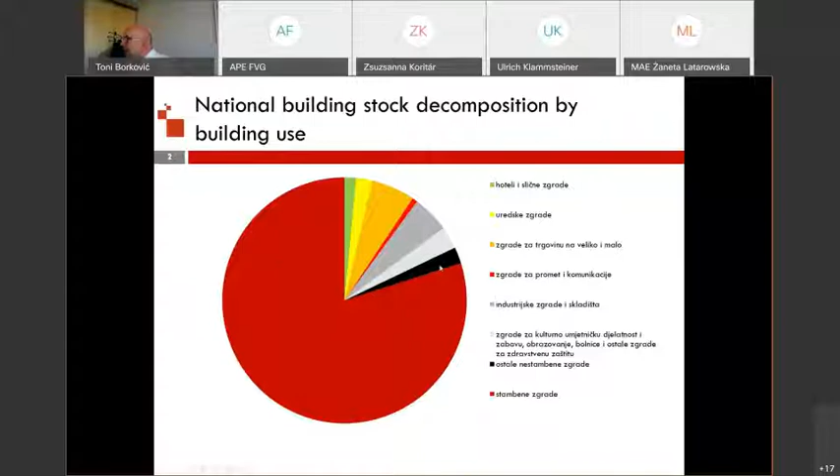I wanted to show you that we also have about 80% of the buildings in the residential building stock.

What actually is happening to the building stock in the period between 2011 and 2018, as Croatia has set up the building registry early this year in regulation. It will take some time to consolidate all the databases into the actual national building registry, which will have plenty of interesting information, as it will connect the cadastral database, building ownership information, and energy performance certificates for each building and each unit in the building.

But until the registry is actually operational, we always have to try to see what the latest situation with the building stock is, building on last census data and estimating new construction through issued building permits, completed building survey data, and demolished buildings data. We also have to take good care of the ratio of inhabited and abandoned residential buildings, because as I will show you, it presents a pretty big problem in Croatia.

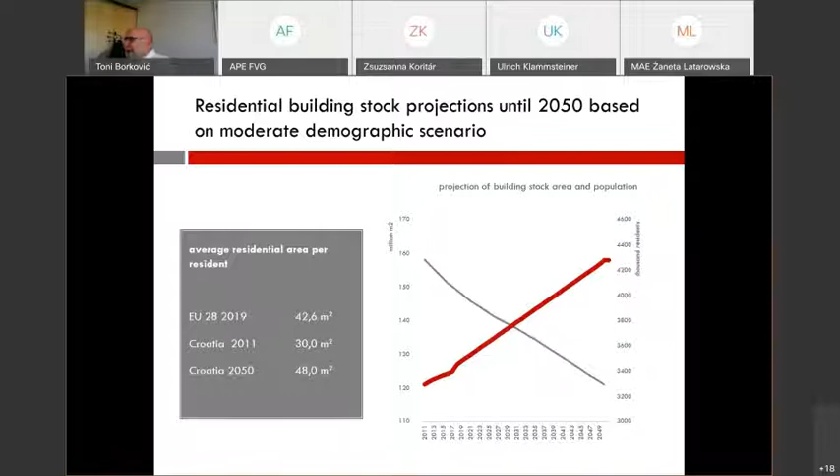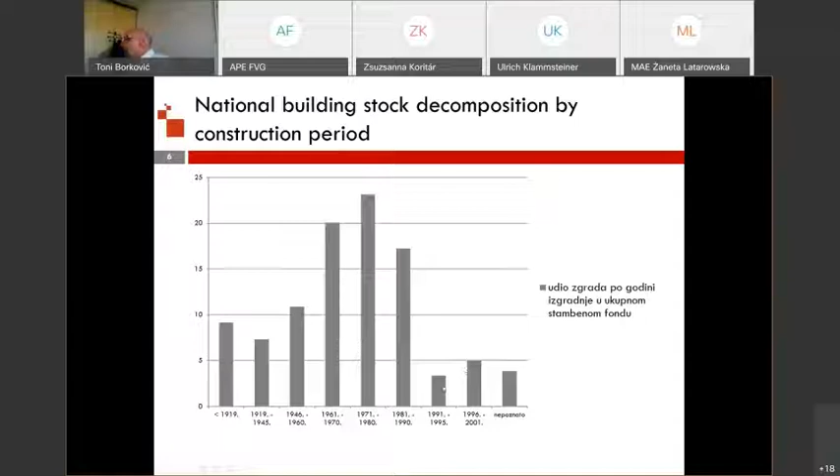If we look at the composition of the building stock by construction period, we can see that we still have most of the buildings constructed in the post-Second World War era, in the 60s and 70s, some in the 80s, but in lower numbers. Then due to circumstances in Croatia, growth slowly started again from '91 to 2001. And now for the latest data, we still have to consolidate it.

If we look at the characteristics of the building, we actually managed to find out from the Energy Performance Certificate database how our external envelope works and what the main characteristics are. We can see constant improvement in the building envelope, looking at the Energy Performance Certificate database, but not that big an improvement in the last 10 and 15 years, because the requirements in 2005 with the technical regulation were pretty strict. Actually, they were so strict that we had to ease the windows requirements in 2009, but we tightened up the requirements for windows recently.

But we can see the stagnation in the U-value data for external walls, roofs, and ground floors from 2005 to 2013.

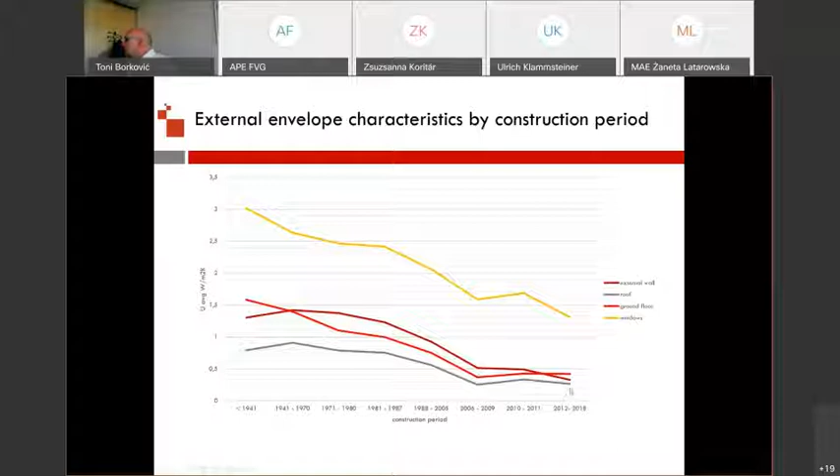Speaking about the disproportionate development of residential building stock in Croatia, these are the counties in Croatia, and these are the growth indexes of built area of residential buildings by counties. Names don't have to tell you much, but there is a hint.

Green is continental Croatia and blue is coastal Croatia by the sea. So you can actually see that we have very strong development, very high growth indexes in coastal counties, and

under average growth indexes in continental counties. And this doesn't actually correspond to population. So we have residential construction in coastal counties, which are pretty much in connection to tourist industry and development for tourism, not for residents.

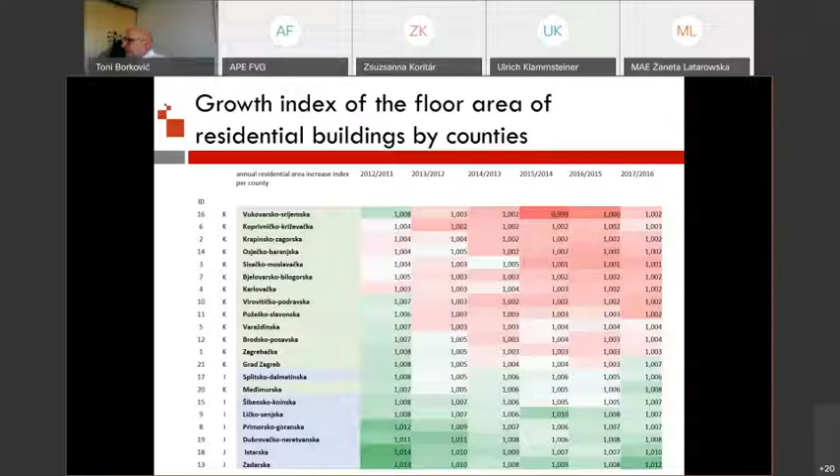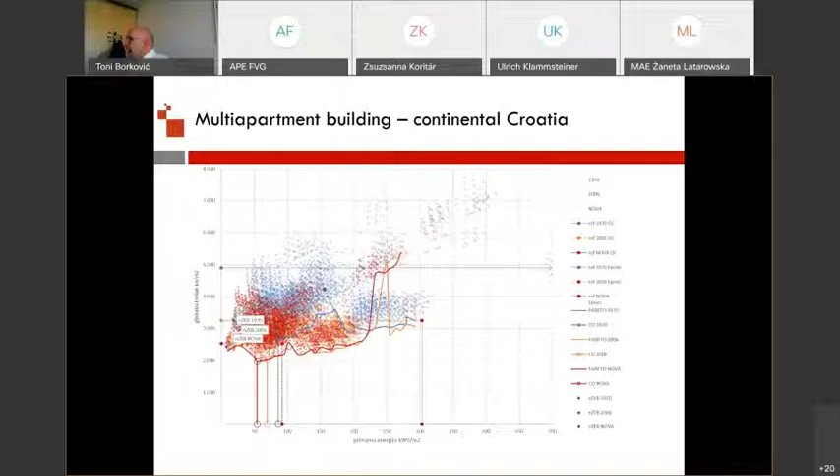And if we look in new cost optimization data for continental Croatia, nZEB requirements are pretty much where we have set the requirements for the buildings, or for residential buildings they are dropping lower in continental Croatia. And when we look at the coastal Croatia, even deeper. For new buildings, nZEB requirements would be actually zero energy building.

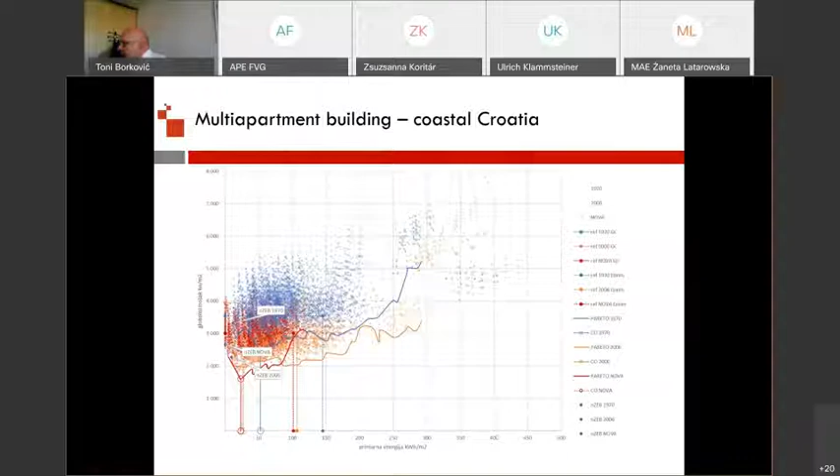So cost optimum here shows that at the present time, Croatia can go even stricter with energy performance requirements for new and refurbished buildings.

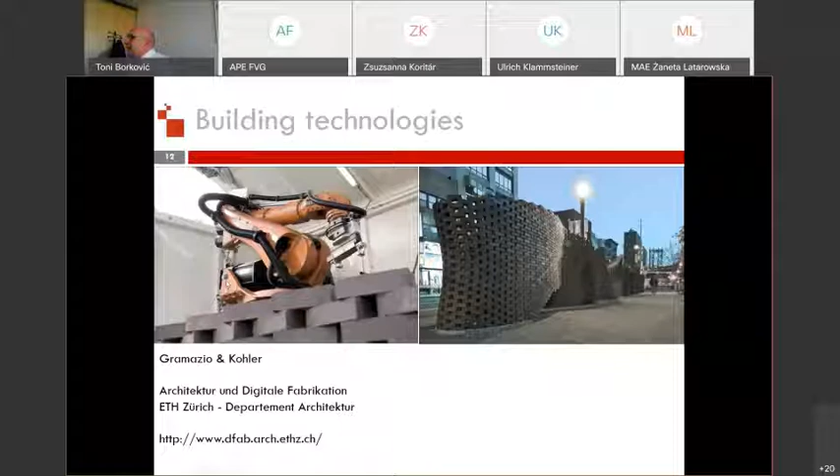Can we do it? There are technologies which are already on the market, which are available throughout Europe. Some of them are part of the research as the building robots, and I'm very keen on this development. We have a number of 3D printing technologies which have been developed lately, and one of those which is very interesting to me, which is not actually even the construction technique.

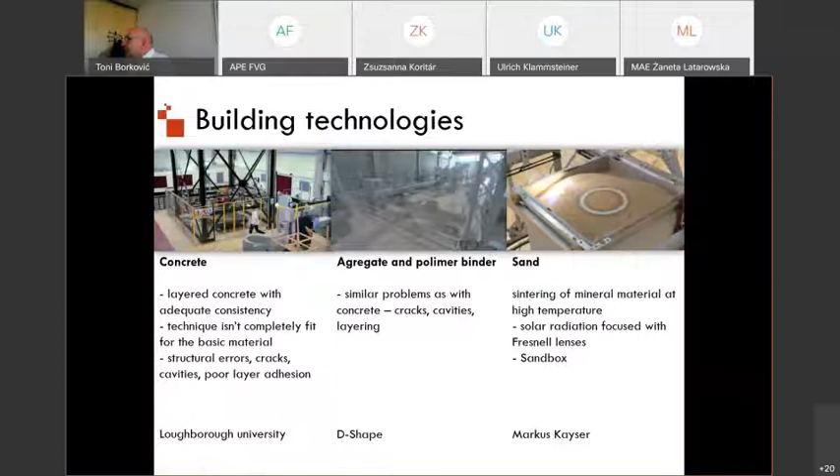This was the technique which was developed by a German artist, Markus Kayser, who actually used Fresnel lenses and sintered the sand to create solid objects. So very interesting technologies which are being developed. Or Enrico Dini from Italy, who actually wanted to print buildings, but mostly what he is doing recently is printing the decoration. But never mind, this is the technology which is emerging.

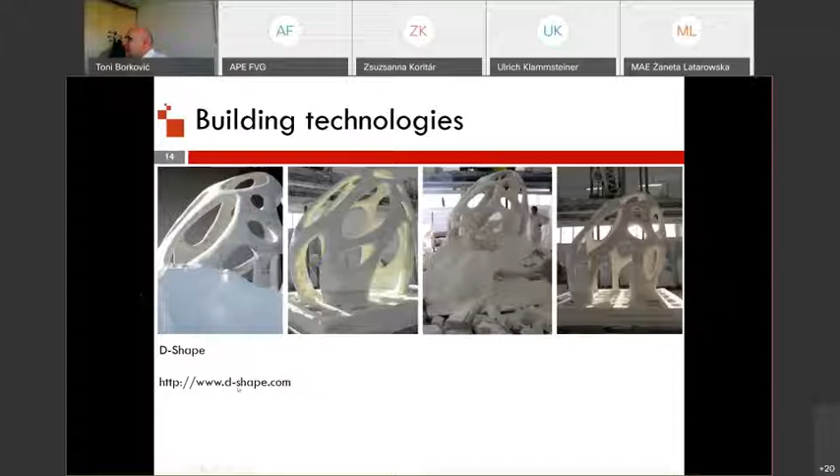Or Loughborough University and concrete printing technology that was actually deployed in Masdar City by Sir Norman Foster.

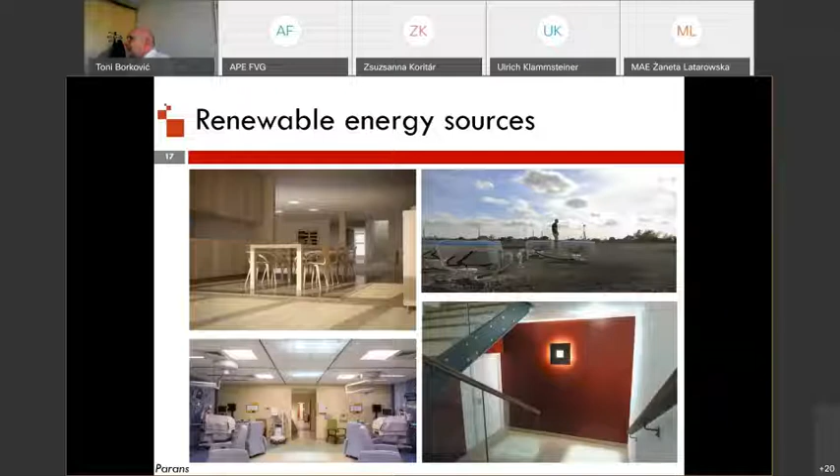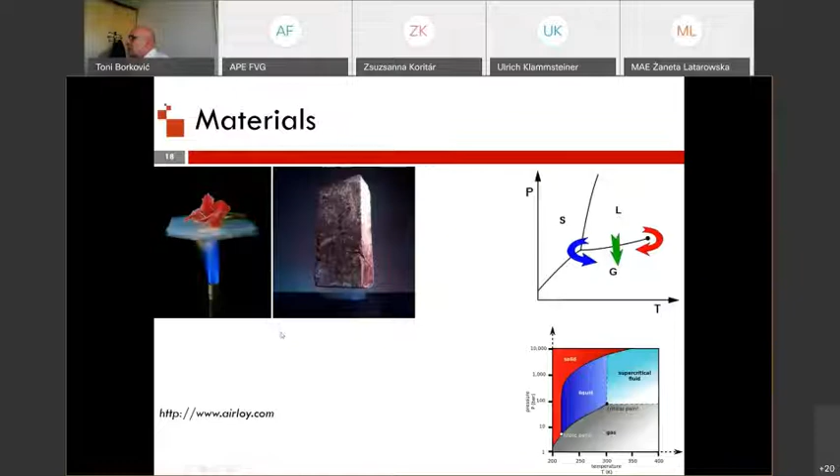Or different variations on making the renewable energy sources more interesting to architects, using the natural solar lighting in the buildings, or new and very interesting thermal insulation materials which are being strongly developed and used at the moment.

And some examples of what we actually did. This is the Technological Park Varaždin, which is still waiting for the construction, unfortunately, but I hope it's going to be built very soon, which was designed as a nearly zero energy building before the nearly zero energy building requirements were mandatory in Croatia, but we were expecting it.

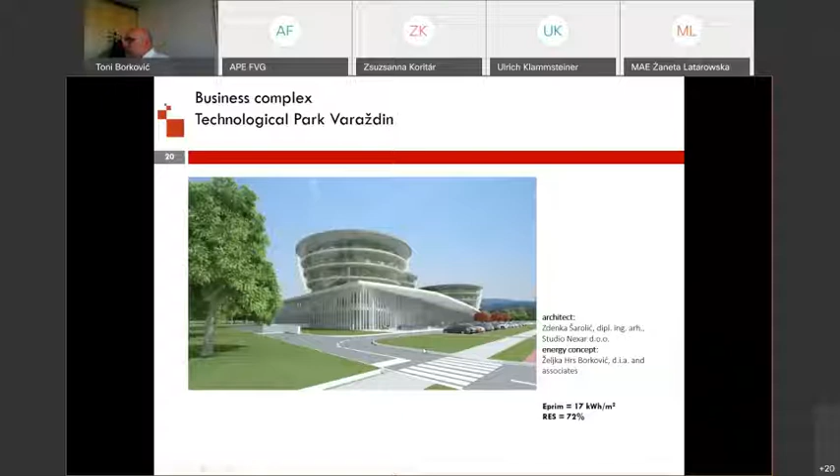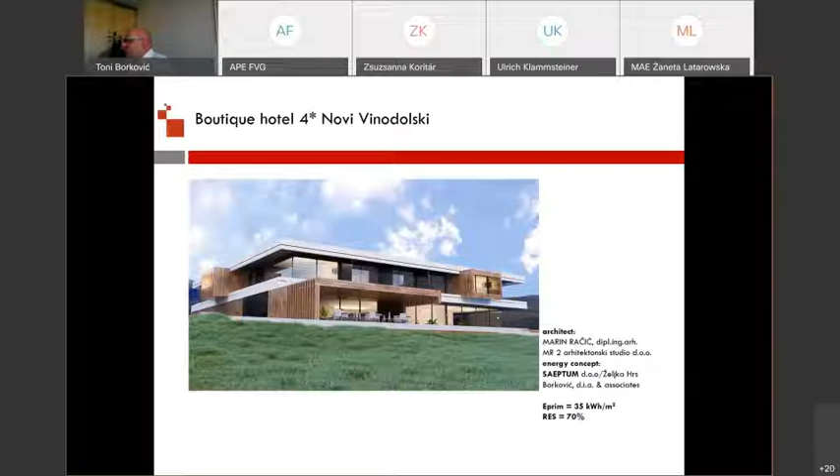And this is one very good example of a technological park or business complex comprising of many different uses, which can be built as a nearly zero energy building in Croatia with very large share of renewable energy sources. Or a hotel, also very demanding building use, hotels with 24/7 building use schedule. So this can be achieved in Croatia.

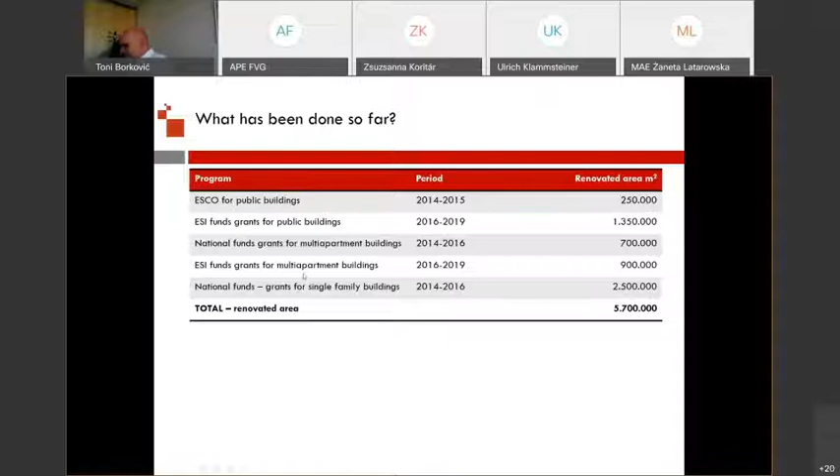And we are aiming at a 3% renovation rate, which in square meters by decades gives very, very large numbers for renovation volume in residential buildings and non-residential buildings, even harder, considering the share of non-residential buildings in total building stock. It's more demanding on non-residential buildings.

And we can see that we are talking about large volume of buildings, and we are talking about large funds needed for the renovation, which brings us to the question. There was a small calculation that I did and compared the investment with the average and minimum wage in Croatia. And it turned out that every employed citizen of Croatia should actually invest between 30% for minimum wage or 15% of his income annually to be able to reach the national renovation goals for energy renovation.

The question is, can that happen? I wouldn't waste too much time more. I will be open for questions later. Thank you very much.

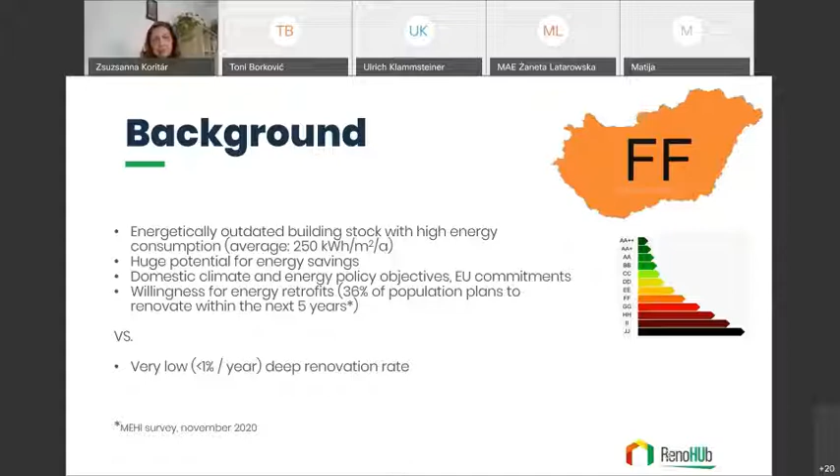Deep renovation rate is very low in Hungary, and this is generally the EU condition as well - it's below 1% a year. So this is what we have to deal with, and we wanted to look at why this renovation rate is so low. We conducted an assessment, already done within the framework of our RenoHub project.

We started with background research. Our first work package is about doing the baseline research, and we carried out focus group assessments and focus group interviews. We had people filling out online blogs for weeks. We made in-depth interviews with different stakeholder groups because we wanted to find out about the fears, the motivations and triggers, as well as the obstacles of Hungarian homeowners related to energy renovation.

What we found, this also will not come as a surprise, I guess, because we identified the barriers why these renovations mainly don't happen. There is a group of barriers related to management difficulties - energy renovations are complex projects, it is difficult to predict the outcomes, it can be a complete success or a complete failure. There is a huge risk, especially in deep renovations.

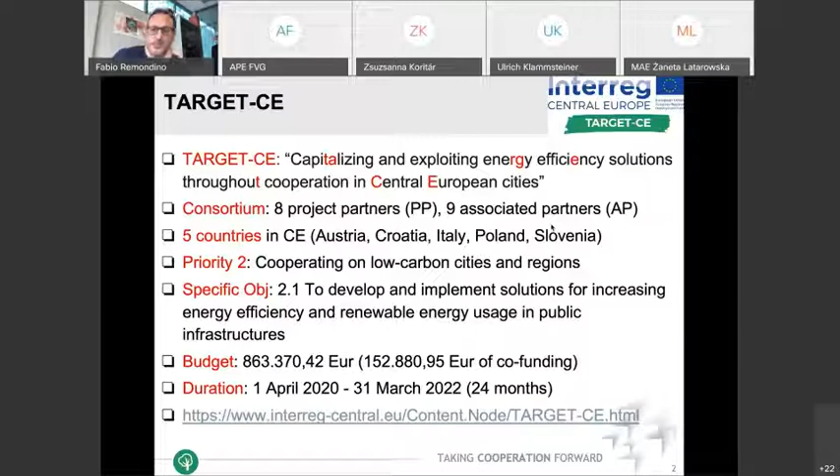So here you can see where the countries, or actually the partners, are located throughout Central Europe. So you see that we have a couple of energy agencies, which is the Mazovia Energy Agency and the Energy Agency in Slovenia, KSSENA. Then we have a couple of research institutes, which is ASA, Bruno Kessler Foundation here in Trento, Italy, and the Weiz Innovation Center in Weiz, Austria.

And then we have a couple of development agencies. One in Poland is called EUWT Novum, and the other one is Sipro in Ferrara, Italy. And last but not least, we have 2 regional public administrations. One is the Union of Bassa Romagna Municipalities in the Romagna region in Italy, and the other one is the city of Split in Croatia.

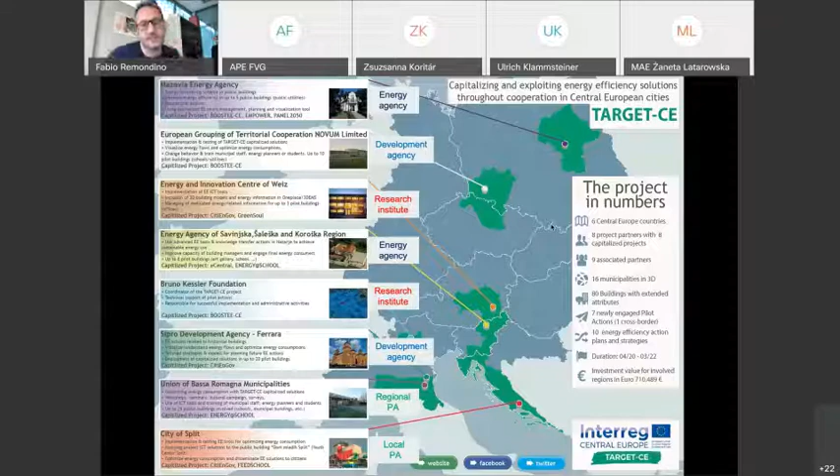So what are we going to do? As I said, the aim is to prevent past activities, past solutions from being forgotten or left unused in the drawer of some desks, of some computers. So the idea is to collect, adjust, and deploy.

So this is basically the translation of capitalization: collect, adjust, and deploy past ICT tools, financial models, action plans, and trainings developed in past projects, and bring them to new local and regional partners.

So the idea is to integrate both technical and non-technical solutions for the benefit of energy efficiency in public buildings. The project has 7 pilot actions, I will show you later a few info, and the idea is that the project becomes a kind of energy efficiency flagship through a unique web portal.

This web portal was developed in the BOOSTEE-CE project, which is one of the projects that is going to be capitalized. BOOSTEE developed this platform called One Place, which you can access through the website oneplace.fbk.eu. The idea is that One Place will now collect, ingest, and give access to the other solutions that we are going to capitalize.

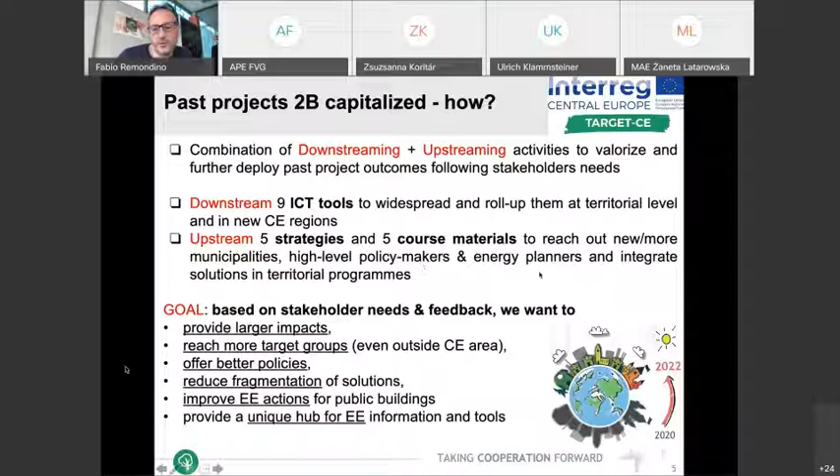These are the projects that the target is going to join and capitalize. On the left, there are 5 Interreg Central Europe projects: BOOSTEE-CE, eCentral, FEEDSCHOOL, Energy School, and CitiEnGov - these are all closed or mostly closed projects, some recent, some a couple of years old, but all funded under the Interreg Central Europe funding program. On the right, there's one Interreg project, LOWPOWER, where MAE was involved, and also 2 Horizon 2020 projects, Panel 2050 and Green Soul. So they're quite heterogeneous in terms of funding program and organizations, but the final goal is to get the best out of them and reuse what was developed for the benefit of the energy efficiency field.

So just a couple of examples of what we are capitalizing, or what we're doing right now. From eCentral, we are taking the tools and schema developed for the management and renovation of public buildings. The idea is to have the eCentral decision support tool embedded under the Oneplace platform, so it's easier to reach and easier to be deployed and used in new pilot areas.

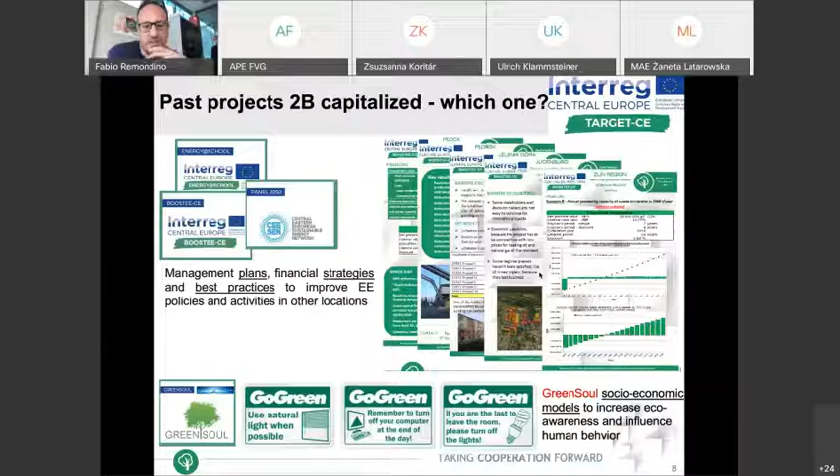The last example I'll give is from Green Soul, a former Horizon 2020 project dedicated to socio-economic models aimed at raising awareness and influencing human behavior in the direction of 'green soul', as the name says. Different logos and stickers were created, and the idea is to reuse and deploy them, for example in schools, public buildings, and public offices, to let people be more aware of green behavior.

Last but not least, this is the main capitalization part, related to the Oneplace platform, which was developed inside the BOOSTEE project. One Place is a unique platform where multiple information and tools related to energy efficiency can be found, with different modules you can access. The overall idea is to offer content related to energy efficiency experts, best practices, financial roadmaps, as well as 3D cities used to visualize energy information.

So these 3D cities, they look like this. If you enter the Oneplace platform, there is a module where you can have access to 3D city models. Here are some examples in the images. And then buildings can be queried.

You can click on a building and get the various attributes of that building - not only the name, location, owner or area, but also energy related information, like how much energy loss the building is having, whether there is an energy audit, and which kind of heating system is installed.

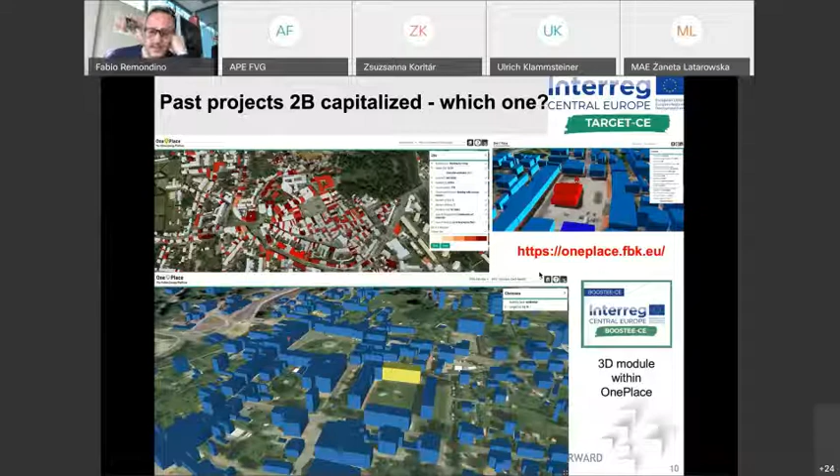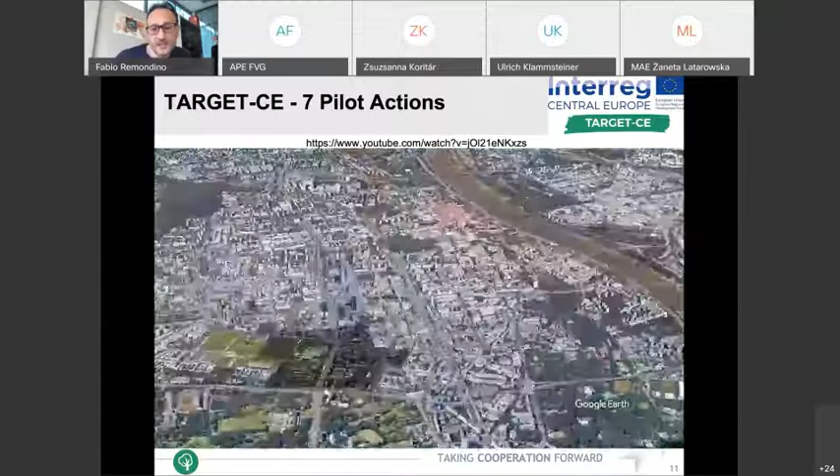As I said, the project involves 7 pilot actions. This is a video that we created just for communication purposes. For example, this is the Mazovia energy pilot - the video mentions what it is bringing, which kind of pilot it is offering.

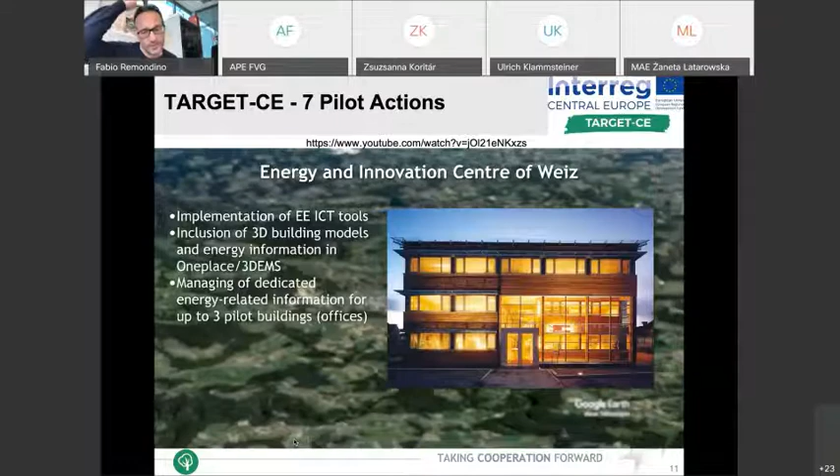So what are we doing right now? Which kind of activities? As I said, capitalization is a super tricky word, so it's super complex to harmonize everything and deploy past things to new locations. The idea is to harmonize past activities, but also adjust them to make them suitable and usable by other people, and to make them reliable. This is a super difficult part.

Everything will be available under the unique hub, which is the Oneplace platform that I showed you. Why do we want to do this? Because having a unique hub will reduce fragmentation, and people can only access one platform in order to get access to the different solutions.

We are trying to reach more target users. We are trying to collect feedback from stakeholders in order to better adjust these past activities. We have just created all the 3D city models of the new pilot actions, so soon they will be available online. And we are trying to get access and deploy all these tools to the new pilot actions, which are just starting now.

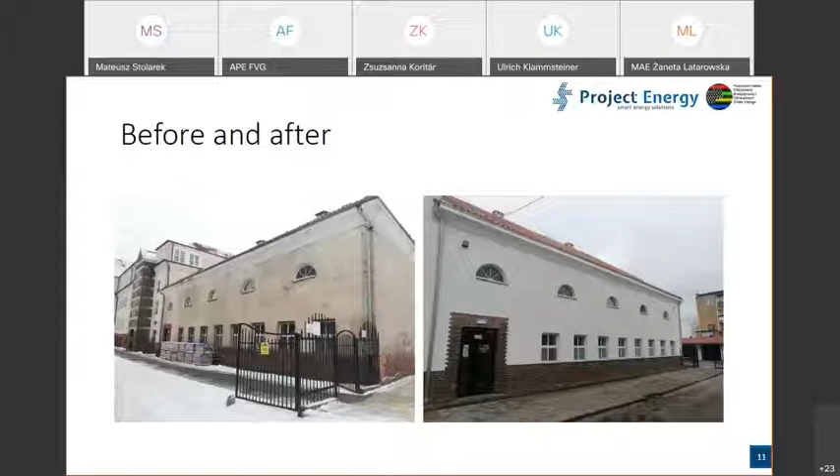The main problem occurring in investments carried out in public facility buildings is the users and their presence during the construction work. The client has to reorganize as much as they can the use of the building. Also, the contractor has to adjust their work to reduce the inconvenience of the ongoing works.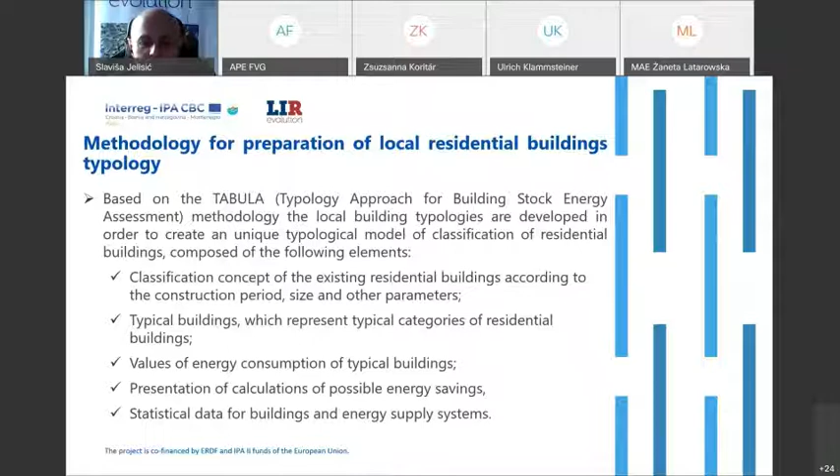Local building typology is actually based on classification that is necessary to have comparative analysis of buildings based on specifics of architectural heritage. The basic criteria for classification was period of construction and architectural and urban features of buildings. In our implementation area, within different periods in history, we have different approaches to construction and the use of building materials.

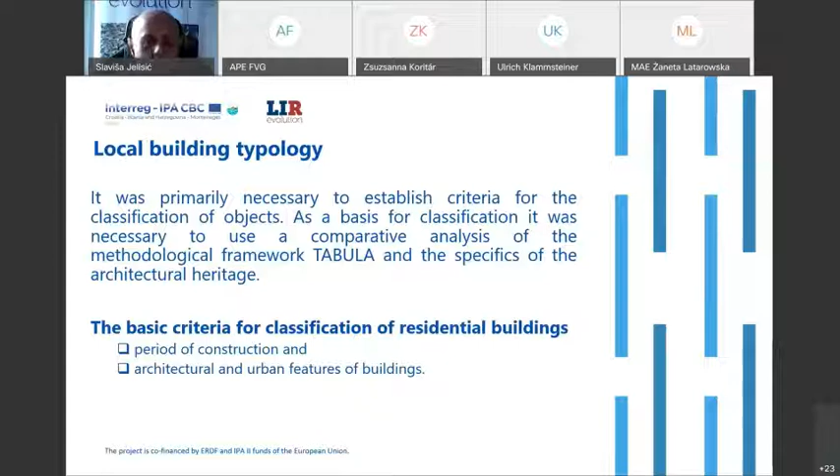The key historical thresholds identified are when new construction concepts, architectural styles, or technological procedures and materialization of buildings emerged, and the organization of residential buildings can be fully or partially aligned with national typology buildings which exist in Bosnia-Herzegovina and is in preparation in Montenegro, helping to use modern methods in energy rehabilitation of residential buildings and materials of old buildings.

Also, during these activities, we did a thermographic survey. It's very important to see the situation on the building envelope or elements, and to detect different materialization, poorly insulated parts, damaged insulation, and structural elements on which moisture has penetrated, etc. This survey was interesting because it's not new, but relatively new for municipalities in Bosnia and Herzegovina, and should be used for detection of the situation on building envelopes.

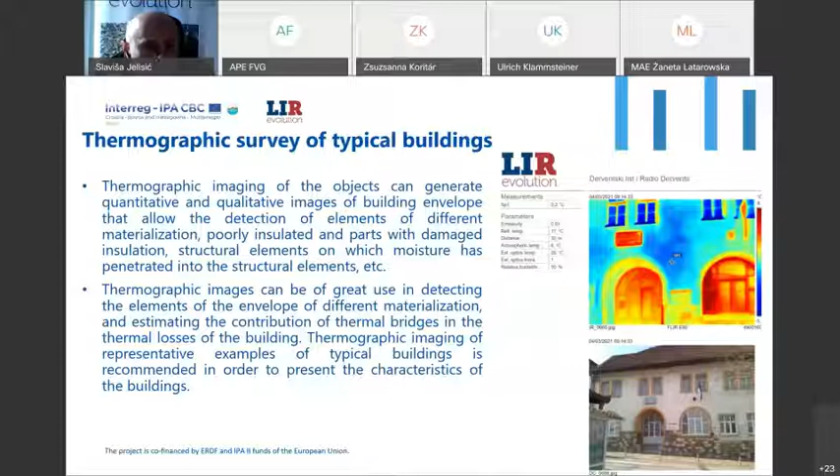So shortly, with this, we are producing this local building typology, but also we produce a list of recommended energy efficiency measures for each building type that can be used in a future serial reconstruction of houses that will obviously come.

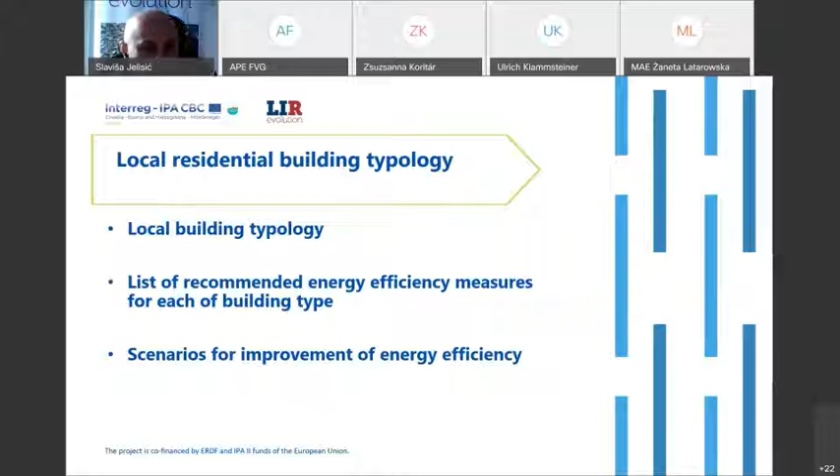Also, with this building typology, we prepare scenarios for improvement of energy efficiency, followed by calculations of what will happen with business as usual, especially compared to prices of energy and increased consumption. We also produced two scenarios: an advanced scenario related to standards currently implemented in countries, and an improved scenario showing the investment required if we go for very high energy rehabilitation to get buildings close to near-zero energy buildings.

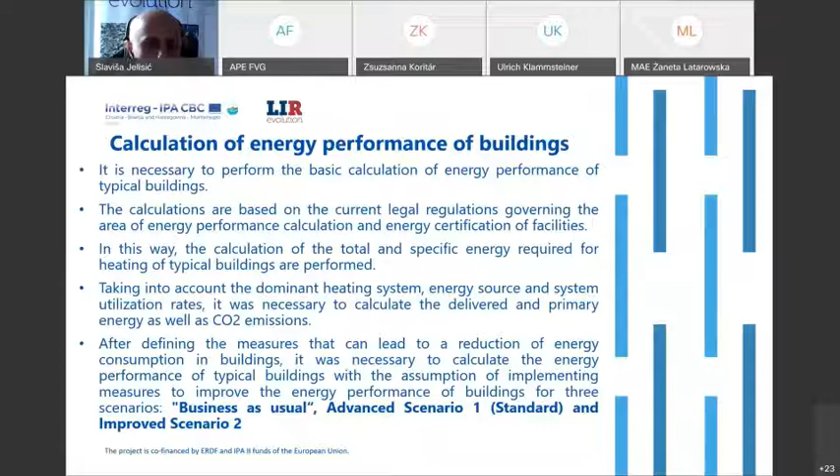Together with this, within the project, we are performing energy audits in public buildings. We are analyzing the situation in public buildings and producing detailed energy audits with recommended energy efficiency measures and economic projections.

Parallel with this, we prepare energy management trainings and coaching for those managing public buildings. We are also preparing software for easier energy management and monitoring of energy consumption, and analyzing potential financing sources, including different financial mechanisms and matching of financing for reconstruction of public buildings.

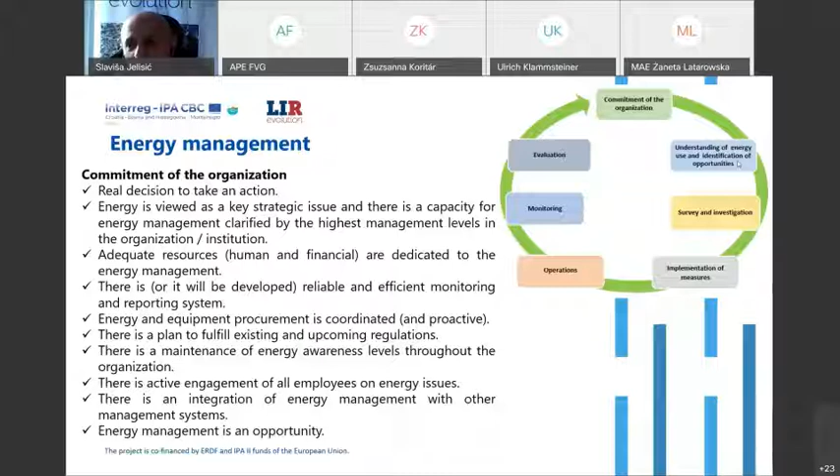I will not go into this, but in the energy management cycle, we found that the commitment of the organization is a very important first step. We found it was very important to have this organization in line with everything that has to be done during the reconstruction of the building, implementation of energy efficiency measures, and also in operations and management.

One key thing that is happening is that even after energy rehabilitation and implementation of energy efficiency measures, we have improper operations. So we found that monitoring of energy consumption and proper operations and maintenance is key for successful energy rehabilitation of buildings. Otherwise, we didn't achieve anything if we implement energy efficiency measures but operations are not at a satisfactory level.

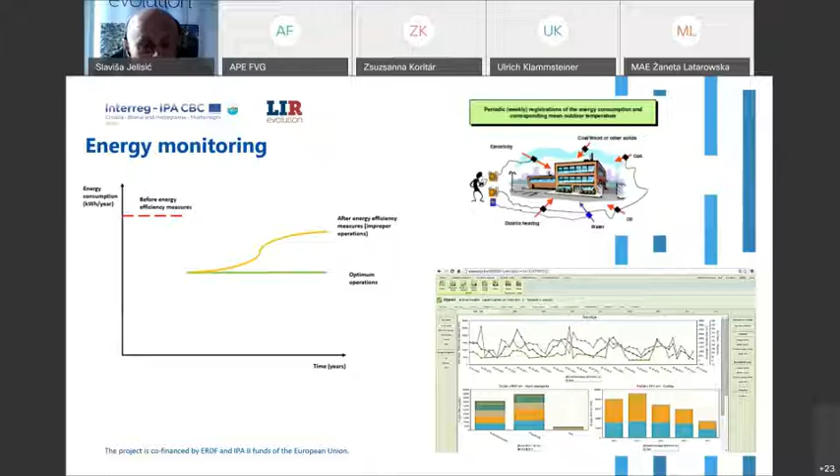In addition to this, we also have renewable energy demonstration actions attached to public buildings. Here we are talking about replacement of boilers that use coal and wood as fuel with the use of wooden biomass and pellets. This is the first thing that can clearly improve energy efficiency of boilers, but also replace the fuel to decrease the emission of greenhouse gases.

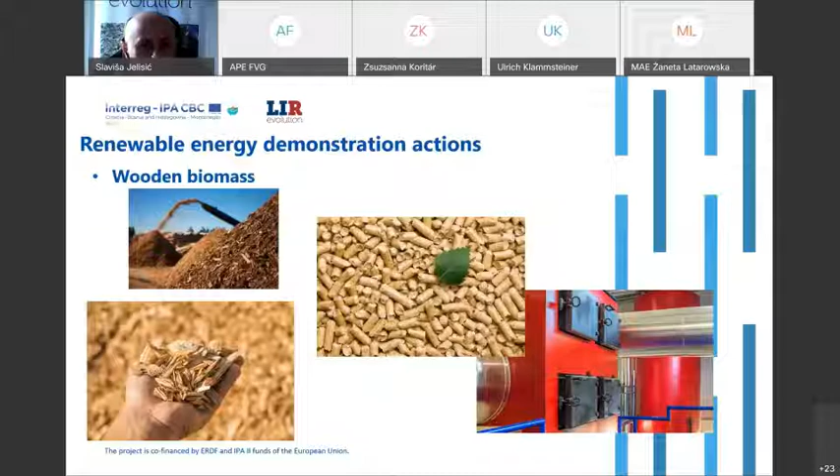The second one is related to use of low enthalpy geothermal energy and heat pumps. Here it's very interesting that we are doing thermal response tests to see what is the output of heat within these vertical closed loop installations. It is especially interesting to implement this kind of installation at the municipality of Laktaši, for example, which has hot springs nearby, so the expectation for thermal response and heat we can get is very high.

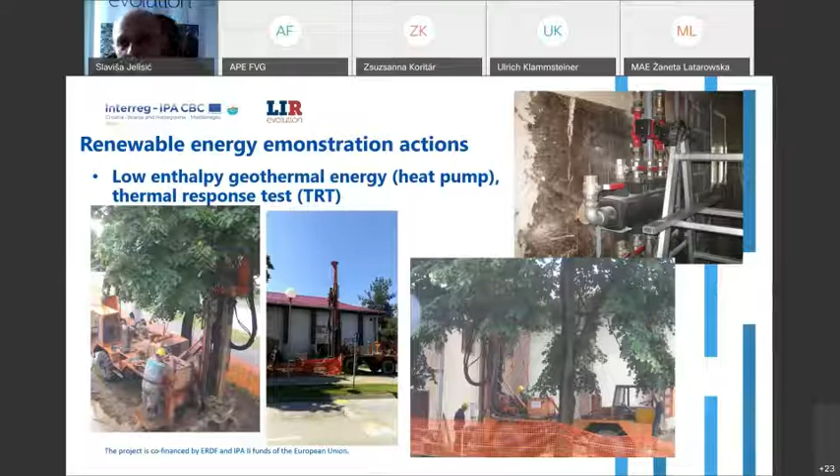This was fast, I hope you caught some of the activities, because we have many of them in this project. In the end, I will just say we wanted with this project to have all the activities related to surveying the building stock in these targeted municipalities and cities, to see what is needed for improvement of energy efficiency, including energy audits and trainings in energy management and monitoring, as well as to see which renewable energy sources can be used for public buildings and what is suitable for that.

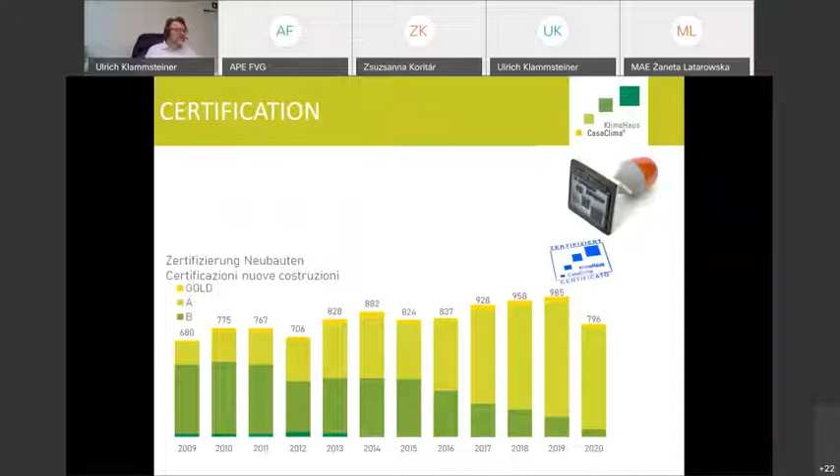Let me explain the process. Over these years we have certified more than 16,000 buildings. For new buildings and refurbishment, we certify approximately 2,200 per year, and with our partners, like APE Udine and other agencies, more or less 1,500 buildings a year.

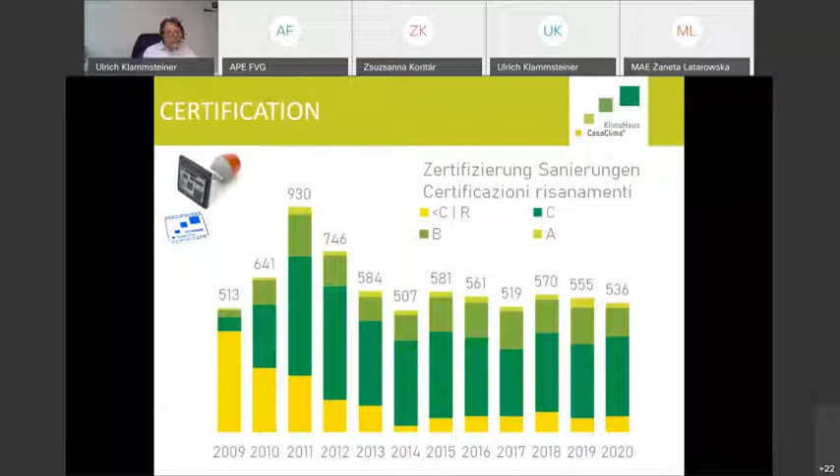For this occasion, just to note, we have more than 50 courses online through our agency, as well as consultancy. We have a small energy check where we go to people's homes and give consultancy on what they can do for the next step in refurbishment.

We are also working in research. I think our biggest research area is our software. We have our own software to make the energy balance, energy verification and certification, and also for communication we have a magazine.

We are also working with partners, for example the Klima House in Bolzano, and this year on a digital edition. The CasaClima Fair, CO2 Kubus, is also a kind of communication - a cube 8 meters by 8 meters, showing what it means that we create per capita more than 8 tons, or in some cases more than 20 tons, of CO2 per year.

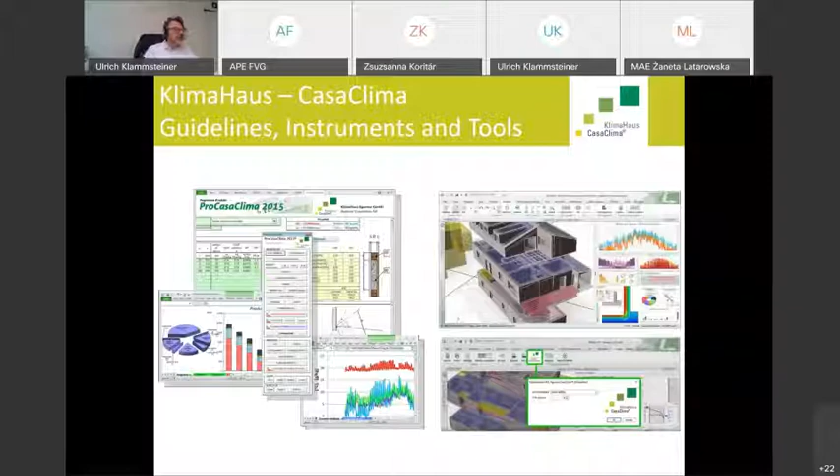We also put out software for valuation of dynamic hygrothermal values, useful for refurbishment and internal insulation - that software is also free. Next, we have our guidelines, since some things weren't regulated by calculation, so we regulated them in a guideline. We put out the technical guideline for new buildings in English, and there will also be guidelines for our sustainability labels.

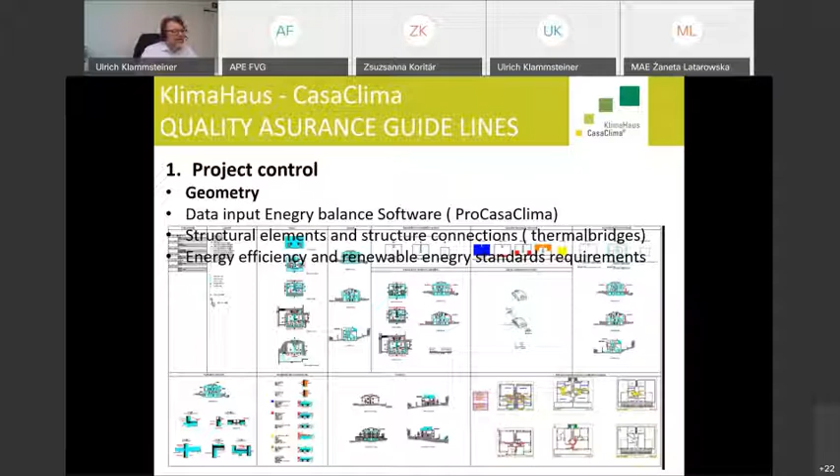What does project control mean? It starts with the project - the geometry. I think this is very important, because without a good vision of the geometry, you cannot make an energy performance calculation. So we check the data input of the software and make checks on the connections.

We also have a guideline, in Italian, that is essentially a catalog - we've proven more than 400 systems and construction connections. People can use it anywhere in the world, because the technical physics isn't specific to South Tyrol, so it can be used quite easily.

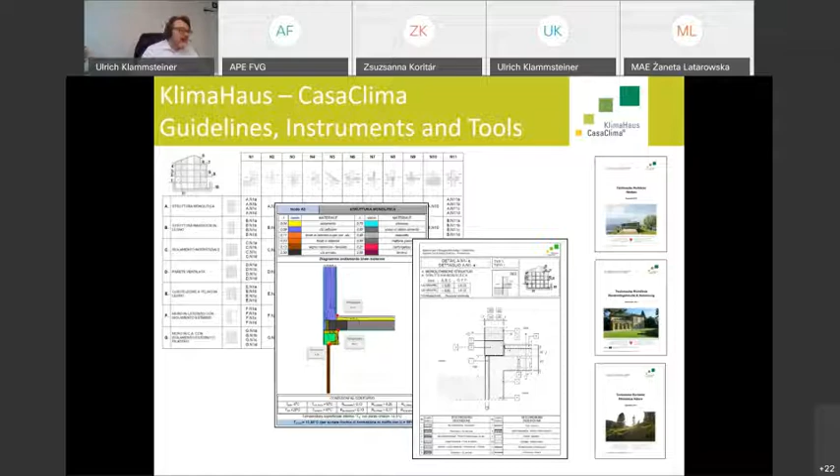Then we move to the construction phase, where we make audits on site to perform the control. We compare with the data from the calculation, identify the products and the connection details, and check the conformity of the requirements.

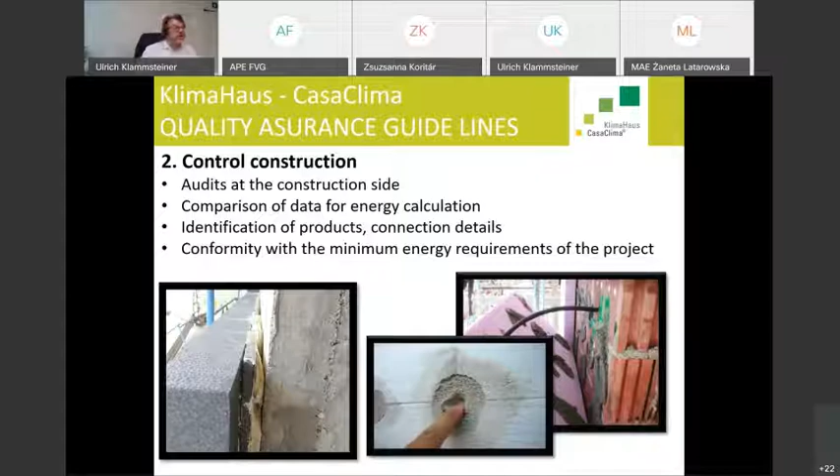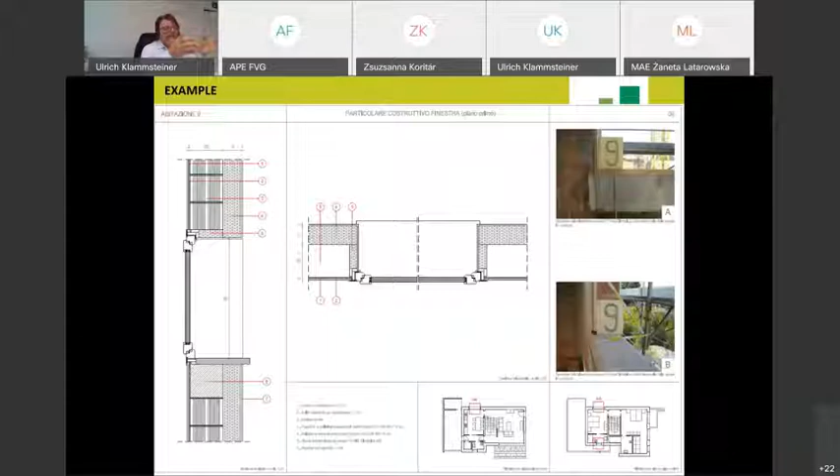Just an example to show it - here I have the project of the window installation with the layers, and then on the construction phase we go there, take photos, and check if it conforms to the project.

And that we're doing not just for one building, but for every building for the certification. The CasaClima certification is also a certification of the ISO 9001, because it's not just a technical issue, but it's more a management issue.

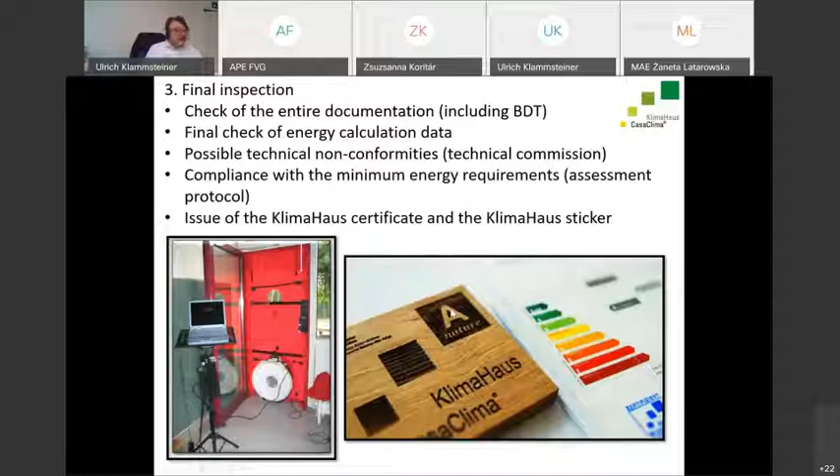Okay, how does it work? Yeah, it works quite well. You know that in Italy we have a quite good energy performance, energy efficiency law, but it's just a paper tiger. So it's very good in the calculations, everything is, but on the construction phase, nobody goes there and makes the control. It's like playing soccer without a referee.

You know, they say it also - in Italy, when it's about needing control on the construction side - I always say, okay, Inter and Milan, they play in Serie A, and they never play without a referee. Why do they do it? Because it's simple. Because you need a referee, because otherwise you don't play well.

And that is our mission: to say, okay, if you want to give quality in energy efficiency, and in particular for refurbishment, you need a quality system, not just in the planning, but in the realization.

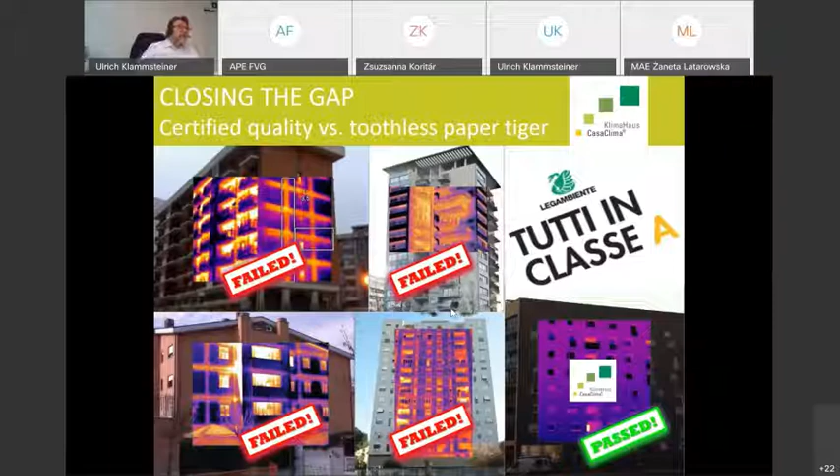Just so you know, we also have quite good work for the sustainability of buildings. We don't have a big rating system like others have. We have a target system - energy efficiency, LCA of the materials. This LCA is integrated in our calculation, so when you make the energy calculation, you also make the LCA. We have a requirement of indoor quality, water cycle, comfort, acoustics.

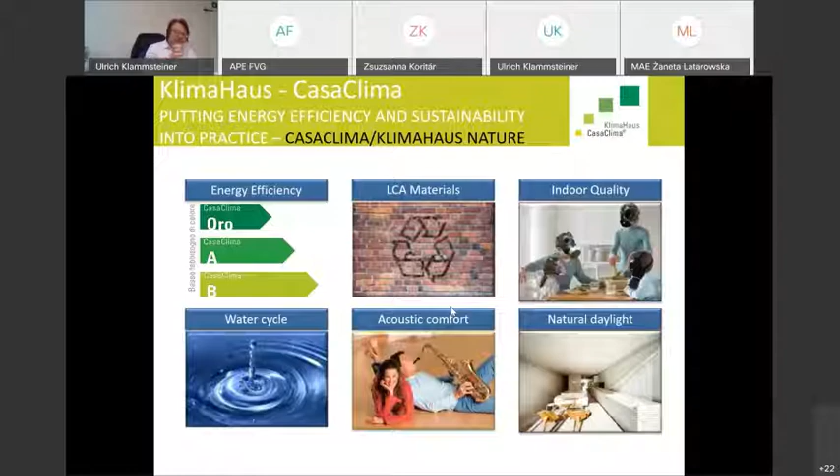So it's like the Pareto principle, that with 20%, we want to cover 80% of the quality. So there are targets, it's quite easy. There's a guideline, but what you have to understand is that then we go on the construction side and we control this. The problem of the system is that you don't have as many indicators at first, compared to what you have on the other side. But if you want to apply it, it's not so easy.

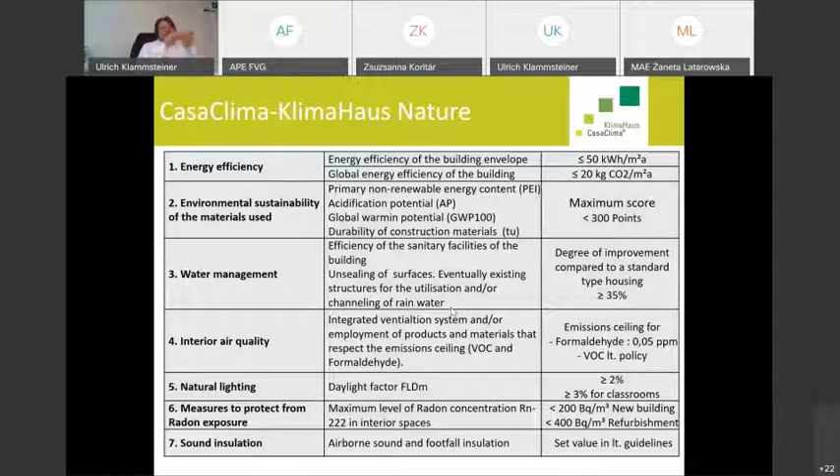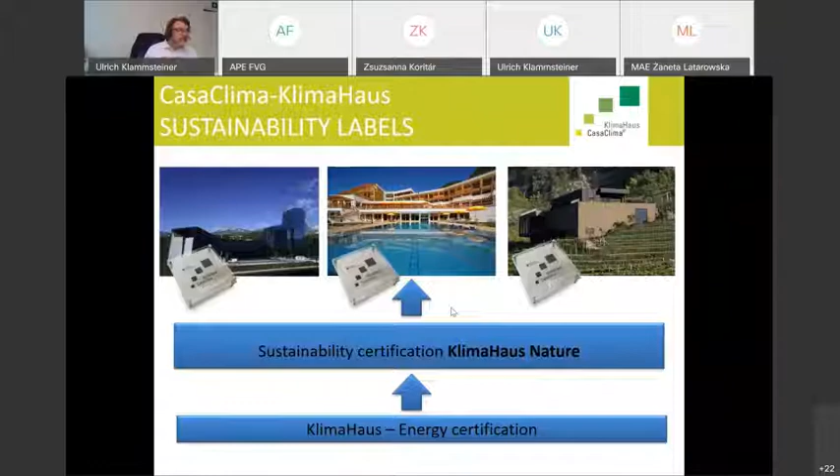Make buildings sustainable on 360 degrees. Then we also have, on this nature certification, labels. We are a touristic region, so we have a Klima Hotel certification, also for buildings, offices, and also for wineries.

And my last point - how to manage quality in refurbishment. So we know that in Italy we have a quite old building stock, okay? And when we see that every building needs to go to NZEB, I think it will be quite different. So I always say the aim is not a nearly zero energy building. The aim is a nearly zero problem building.

So when you make a refurbishment, afterwards you have to check out what the potential for improvement is, what the technical and urban limits are, and then define a technical solution. Then the solution also has to be executable, so it can be applied by the people who work there, because refurbishment is not in the hands of the big construction companies. In Italy, or also in South Europe, it's in the small and medium enterprises.

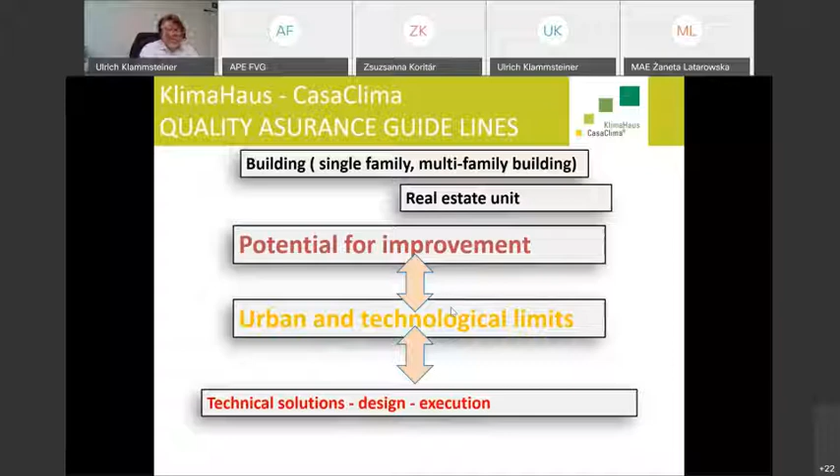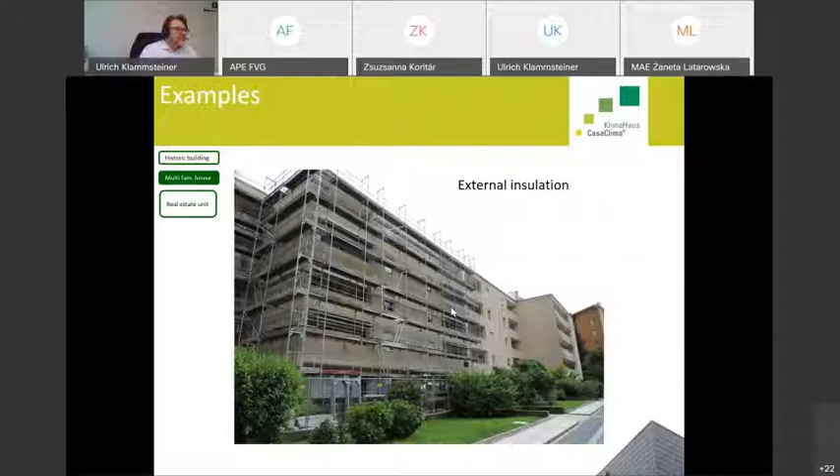So we have also classical - what you do, what is in a project - you know it, it's the Sinfonia project, but we see there that it's possible to make energy refurbishment also in multifamily houses.

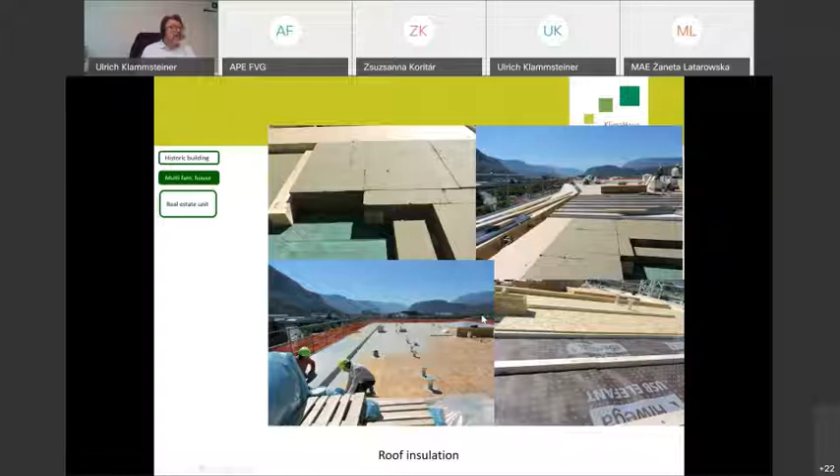But you have to resolve problems that you have when, for example, you make insulation of the roof, but you have to heighten up the roof because logically you have security problems. So you also need to reconstruct the roof structurally, and afterwards, as a result, you can also heighten it up to add a flat.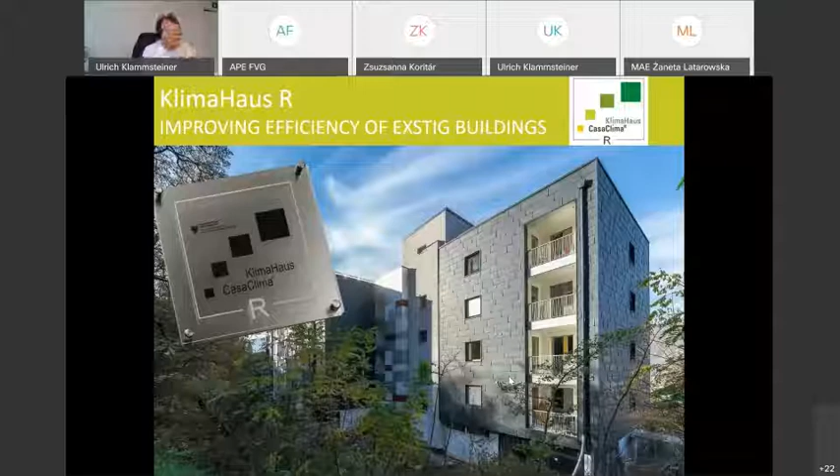Or also with an existing building, it's a system like Energiesprong, but also here in multifamily houses it's not so easy in Italy - and I think also in other countries not so easy - like in Denmark or Scandinavia, where you can just have very much one-family houses or flats, and you put prefabricated facades on them. You have structural problems. So we see that it is technically possible, but you have to design it differently than when the technology comes from outside the country.

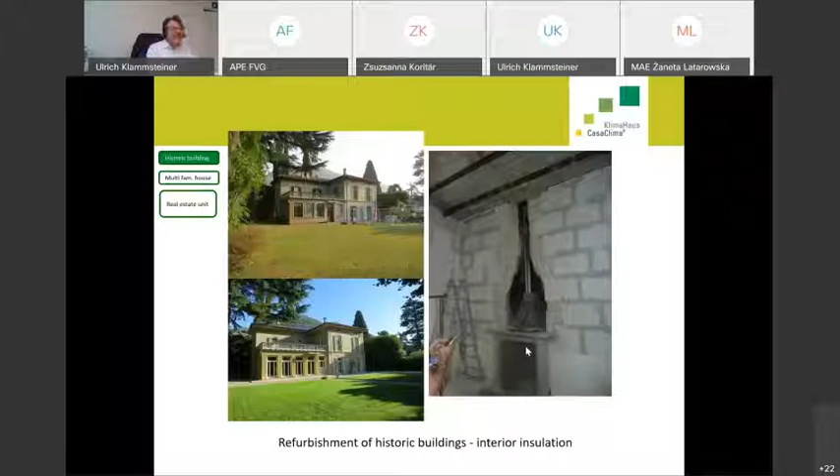Also from historic buildings, this label CasaClima R is like refurbishment, it looks at how you can work on the internal refurbishment. For example, we put out software to make a valuation of the dynamic hygrothermal way, so you also have to plan the connection. When you're working on interior insulation, it's a technical issue, it's not a problem, but it's clear you have to resolve other problems too. You see structural problems of the roof, but when you see before and after on the historic building there is potential, but it's not so easy to just say we make an NZEB building. We also refurbished, not the Palazzo in Turin, but this building in a context where it's not so easy.

So more than saying what we can give as our contribution, when you have a good system that you can manage quite well in a technical way, it's not about certifying one or two lighthouse buildings that you show at congresses. I think we want to achieve energy efficiency and also achieve the aims of the European Union. It's clear you have to go in a broad way and work with more buildings.

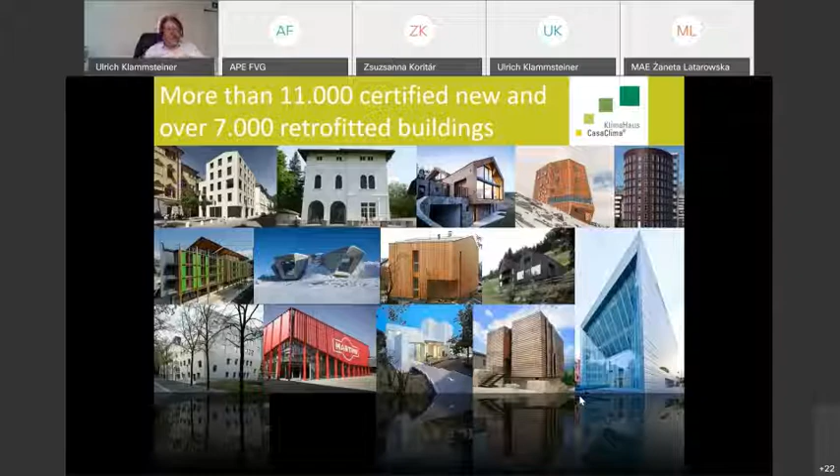So I conclude with this one: it's our lighthouse project, the highest CasaClima at 3,000 meters, but it's just one building, and we have to think about it when we improve this. What I want to repeat is: improve energy efficiency. We have to take out every building and extract the energy efficiency potential from each building.

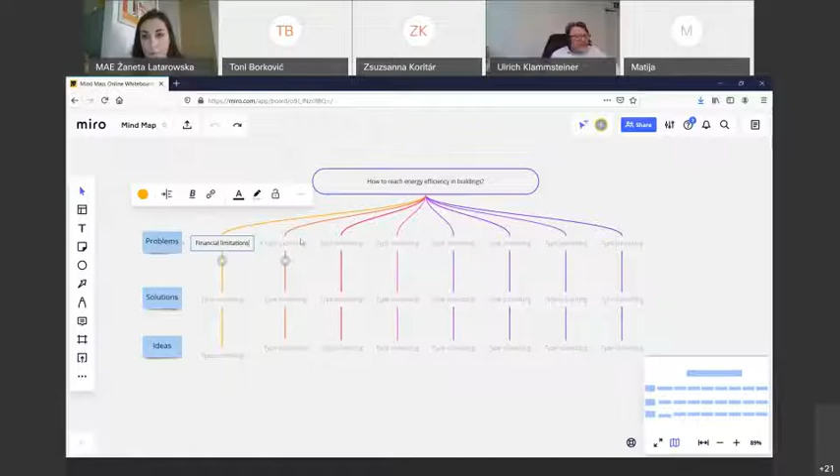As I finished my presentation, I said that just looking at the total sums for funding needed and relating that to average income, it clearly shows there is a large financial gap between the requirements and the cost of refurbishment and the actual available funding.

So this is the major problem that we are dealing with, not the requirements for buildings and EPCs, because that part I can say is pretty much well set up. The requirements for new buildings, the actual quality control of new buildings and refurbishments, the EPCs which have to confirm that the buildings have reached certain energy rating.

Before the funding is actually cleared for the building. So this is the technical part, but the financial part is still demanding, and we are struggling with that part. How to employ all the available funding, how to devise, because of the structure of the ownership of residential buildings, appropriate financial instruments which help and facilitate the uptake in energy refurbishment.

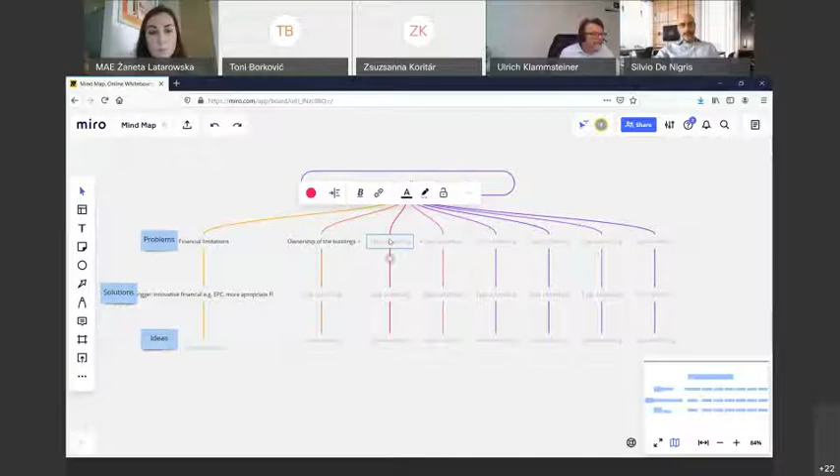It's so easy. Yeah, I think you touched another good point, which is ownership of the building, and also maybe it is related with this or not. It is another issue, which is the decision-making process, which maybe takes too long, and we had these examples of support, consultancy, and so on. Maybe it can trigger this. But I think also the decision-making process, mostly in condominiums and whatever, is really a big issue to tackle.

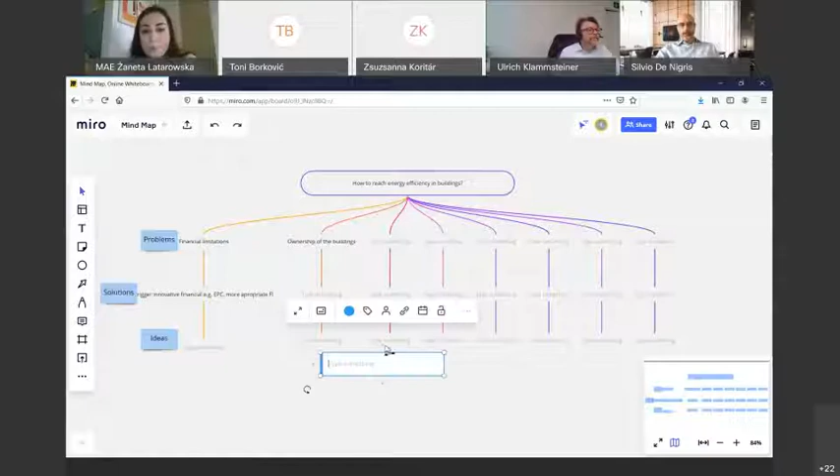I agree with you. There is plenty with decision-making. In Croatia, 3,800,000 live in their own apartment out of 4.5 million population from the last census. We have a very large share of owners living in their apartments, and it's not like in Western Europe. It's a pretty different situation. But further you go to the East, more ownership you have.

And decision making is in the hands of the owners, co-owners of the buildings, and they are not well informed. Just yesterday, I had a discussion about nearly zero energy buildings among architects who are aware of the mandate for NZEB buildings, who are very well aware of what an NZEB building is - no, who should be aware what an NZEB building is - and they actually were startled.

Do we have to do it now? How can we reach 30%? Because this is something - 30% of renewable energy sources - this is something that they weren't thinking about, and that's among the designers.

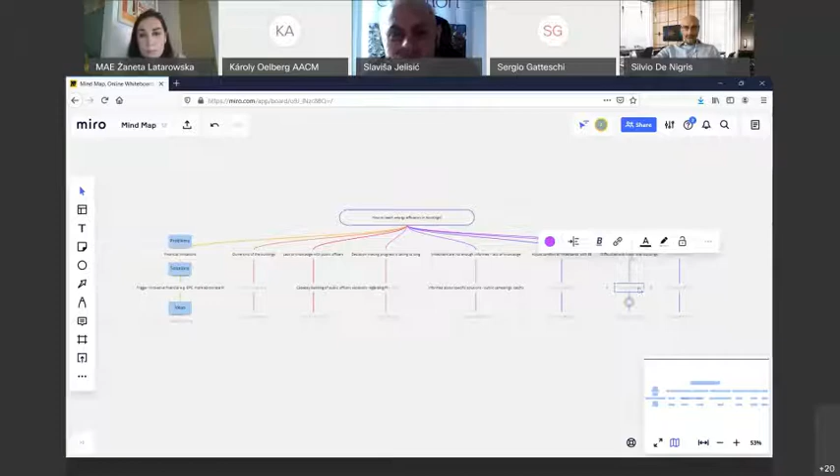Connected to the previous discussion, yes, one of the problems is also relatively the same in Bosnia-Herzegovina, for example - it's the very low price of electrical energy.

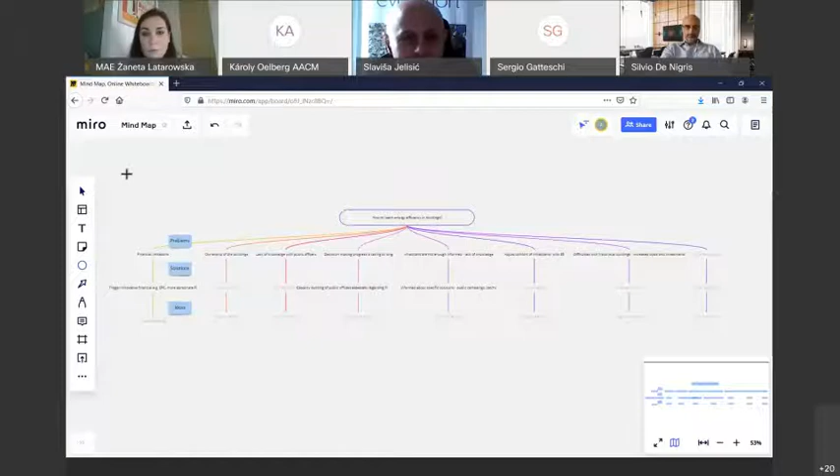When you are calculating economy, investment, and return of investment, you will find the return of investment is too long, and it's not interesting for the owner of the building to go into full energy rehabilitation and renewable energy sources. From that point of view, decision and full commitment of the organization managing the public building is very important to decide that energy efficiency is a strategic issue and to decrease energy consumption.

On the other hand, securing sources of financing is also very important. So I see that matching of funds related to own funds, credits, or even grants are key to fulfill, to make this financial circle complete.

There are maybe three important things we should think about. The first one is awareness and decision to improve energy efficiency in buildings. The second is the existence of subsidies to accelerate the process of rehabilitation of buildings. And the third is standards and legislative requirements. In some countries, they have already started to implement important standards in energy rehabilitation, saying you have to rehabilitate and reconstruct your building according to standards that will increase its class to at least A. So all these parts of activities are very important.

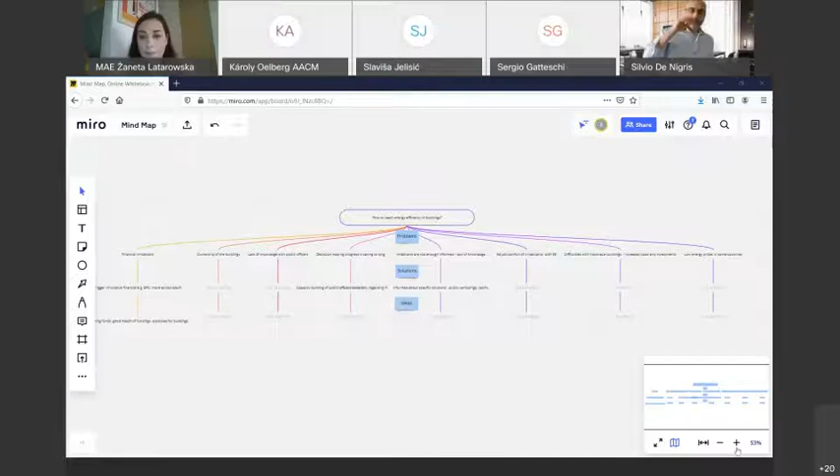Maybe I can also jump in. I think financing is a key point, but we have this huge amount of funds coming with the recovery plan and so on. At least in our country, the discussion is really focused on energy efficiency. I don't know if this is a common topic, I would say so, but I'm really not informed.

So I think we are going to expect some exceptional flow of money in this field in the next years. We should concentrate our attention on other aspects that can smooth the decision-making process, the skills of the people, and I don't know what else. I think as local and regional authorities or agencies, we should build some additional projects on these different issues, because maybe the money will be there. I don't know if this is only my feeling.

I believe especially energy agencies will have a big role here, and it's a very wide field with the buildings, especially since I read somewhere that over 75% of the building stock in the EU is still inefficient. So it will still be an ongoing process.

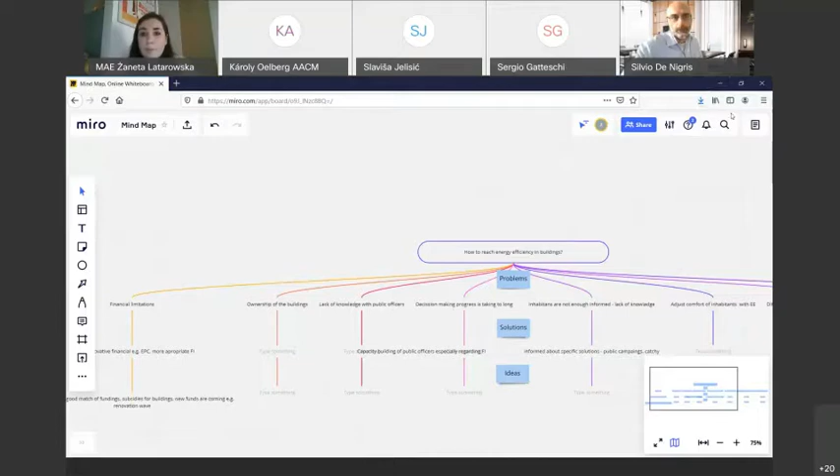Maybe we can anticipate that the next one will focus on financing, and maybe we can have less presentation and more discussion on this topic next time. We will have the pleasure to have on board the European City Facility Managers, a new European tool, a financial instrument to support the development of projects. Some calls are being opened now, so it will be an opportunity to discover this new financial opportunity on the ground, and maybe some of us could apply for these new calls.

So this will be presented, and then maybe we can discuss a little bit about some ideas on how to develop new projects, and also invite some successful projects to present a little of their former experience.